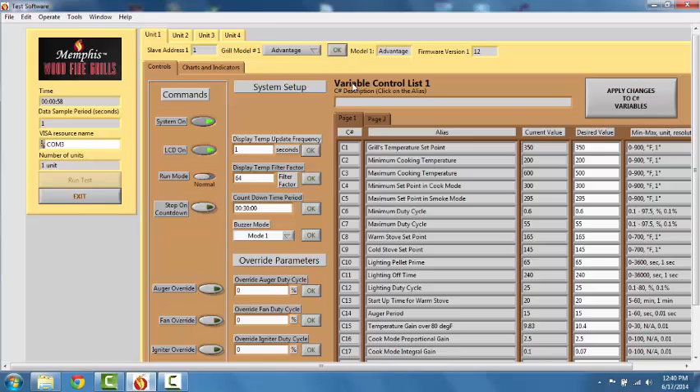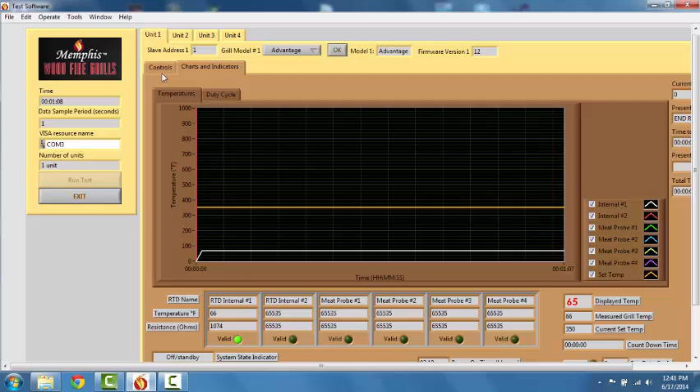Within each unit tab, there are 2 sub-tabs. The first is for controlling the grill, the second for monitoring the grill. The gray outlined command section is used to turn the grill on or off, turn the LCD on or off, select the run mode, and change a few other override features which we will cover later. To apply an actual change to the command parameters, the Apply Changes button needs to be pressed.

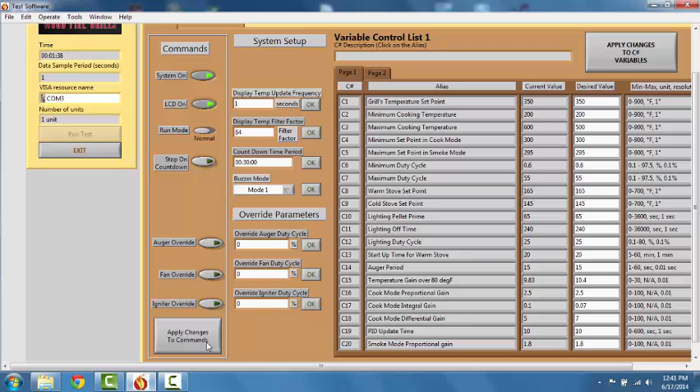We can remotely observe that the grill is on by looking on the Indicators page and checking what state the grill is in. At the bottom left of the Indicators page, we see the current grill state as well as the selected mode of that state. Now let's go back to the Controls tab.

Next to the Commands column, there's an option to select the display behavior parameters. These change how strongly the display temperature follows the measured grill temperature and how often the value on the screen is allowed to change. The countdown period shown here lets you manually assign the timer on the control. To make this timer actively turn the control off, we select the Stop on Countdown button to the left and choose to apply changes.

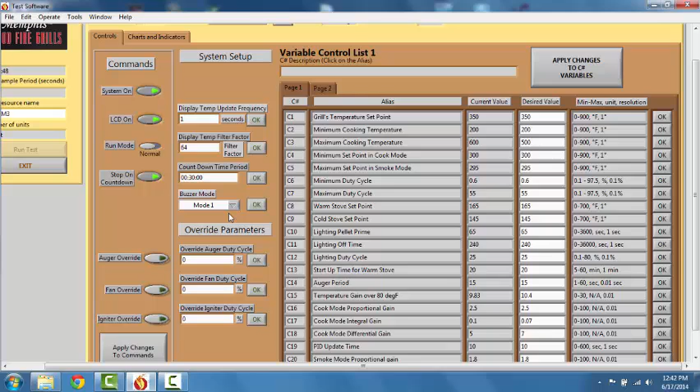The buzzer mode is currently a work in progress. The original intention was to allow for different buzzer features to be tested out. Below this small section are the override parameters. These allow you to manually enter duty cycle values while in the override mode. These values are between 0 and 100% with a 0.1% resolution.

In order to enforce the overrides, the override mode must be selected, as well as the individual commands for each of the powered outputs. If we wish to apply these changes, we must hit the Apply Changes button.

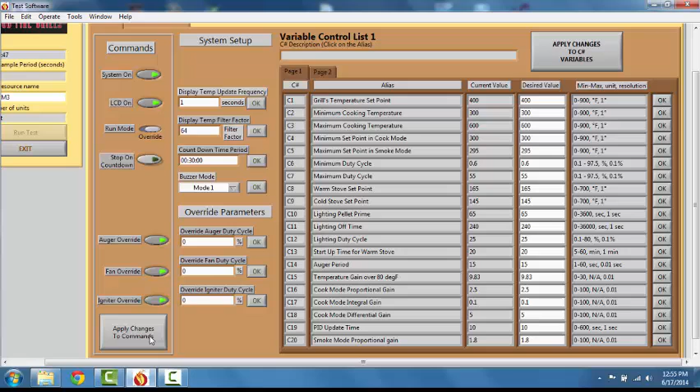The variable control list has all C parameters listed on 2 pages. The current value column shows what is being currently read from the control. The desired value column is what you manually select to change the C value. To apply a change, we have to hit the OK button, followed by the Apply Changes to C variables. In this fashion, multiple variables can be changed at the same time.

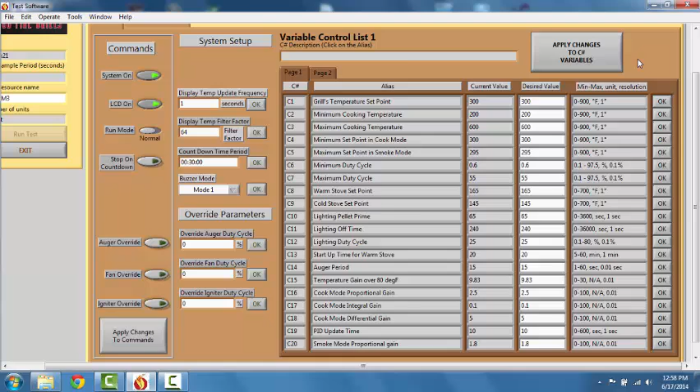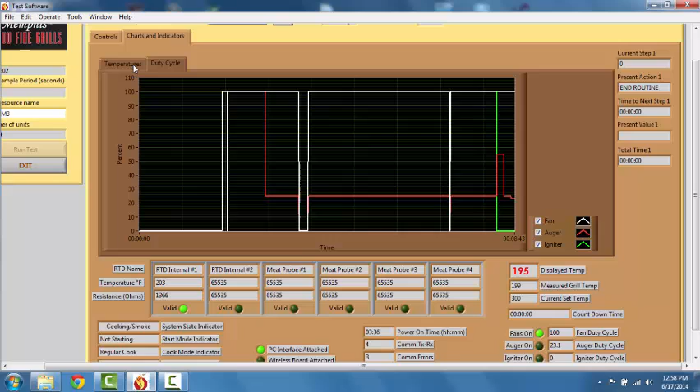Now we'll go to the Charts and Indicators page. Here we have 2 different charts, one for temperatures and one for duty cycles. These charts will automatically scale the x-axis as time progresses. In each chart, we can select which traces we want to see.

Under the charts is all the RTD info. If an RTD is valid, then the indicator light will be on for that RTD. A non-valid RTD is either short or open and will have a value of 0 for short or 2 to the 16th minus 1 for open.

Also listed are the display temperatures, the measured grill temperature, the current set temp, and the countdown time if it's been assigned. Below the listed temperatures are indicators for the current duty cycle of the fan, auger, or igniter. Also, next to the duty cycle value is an indicator light that tells if the output is currently being powered.

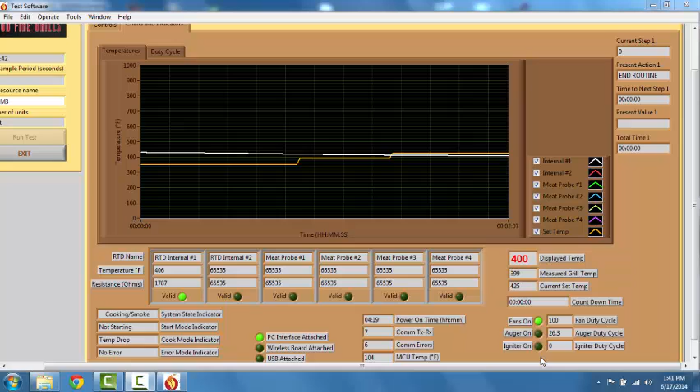To the top right of the indicator screen is all information pertaining to automatic routines. When a routine is not being used, this section is not used. So right now, we're under the normal operating mode. Why don't we go into the override mode so we can observe what happens when we manually override parameters.

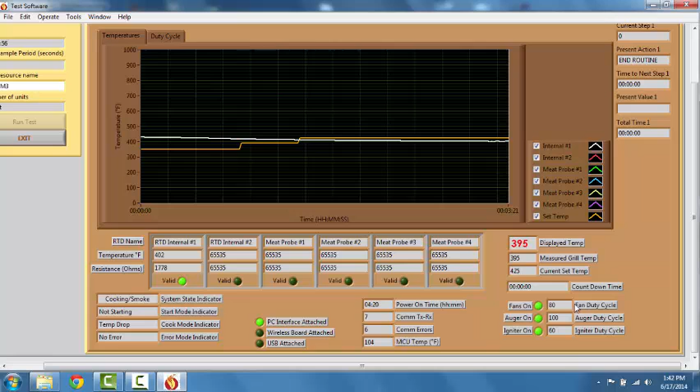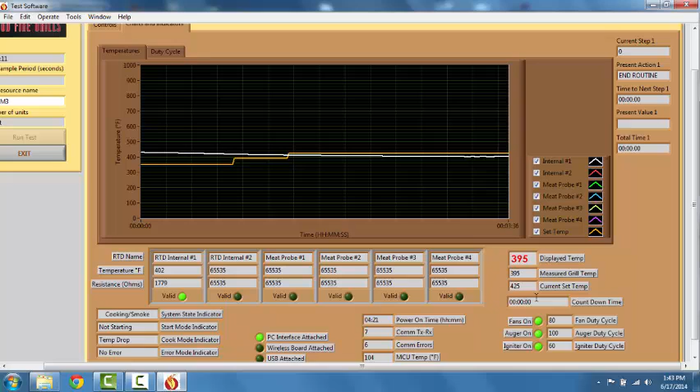Now that we have a feel for the base testing software, let's move on into the routine creator. In order to get there, we need to restart the application. On this routine builder page, we have three large buttons to the right of the text fields. The top two buttons save or load a routine. The routines are stored as CSV files. To run an automated routine, this toggle switch needs to be set to Run Routine.

Note that the routines can be set for multiple units at the same time. For our first action, we'll turn on. Then we'll set the mode to normal. We'll wait for 1 minute after this step. Then we'll change the set temperature to 400 degrees F and wait for another 30 seconds.

We also have the option to go into override mode. When selecting this mode, we only need to choose what the override duty cycles are. Now that we've generated a routine, we can save it to use it later or use it on other units. This is what it looks like when you go to load the routine.

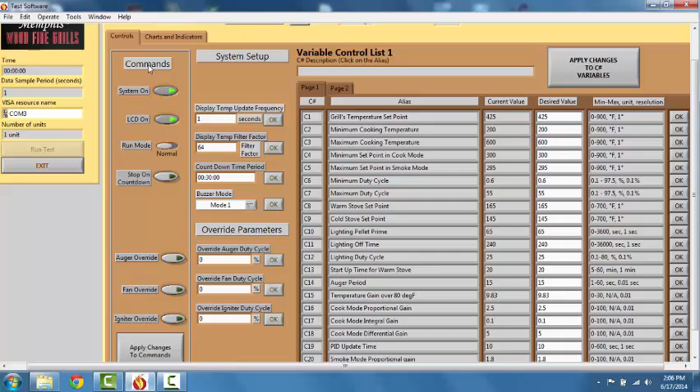Now we'll actually run the routine on the main testing software. Again, we have to go through this setup. Let's begin the test. In the top right corner of the indicators page, we see the current step number, the action, how much time is left, what value we assigned, and how much total time is left in the routine. At any time, we can quit the testing by pressing exit.

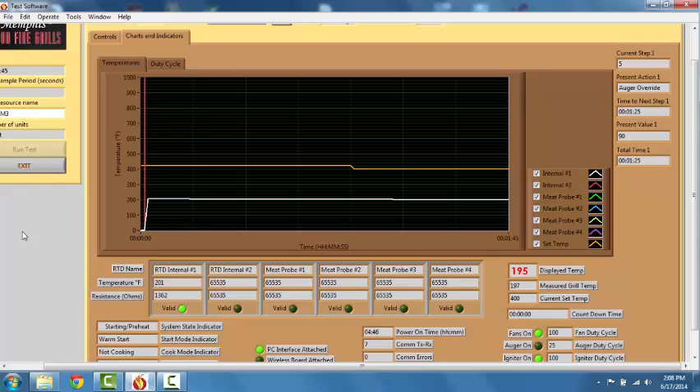Now let's have a look at the data log and the event log. Inside the data log folder, you will see that each test has been recorded with its start time stamp. In each log, there is a start time and a unit slave number. Each data point is also time-stamped.

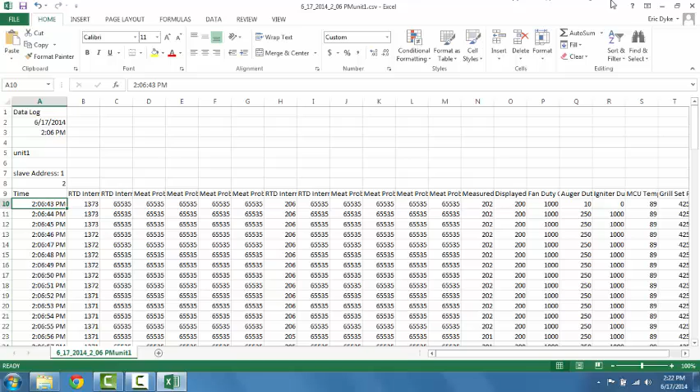Now let's have a look at the event log. The event log gives a breakdown of each important action that occurred, including the state or mode changes to the controller or changes to the C parameters.

Alright, that's everything there is to the testing software. At the moment, there are a few known nuisances that we are working with EFE Labs to correct and improve.